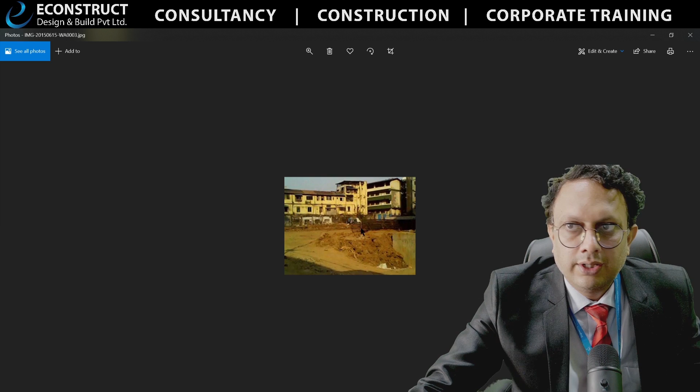This is the first photograph. The excavation is not started. These are the neighboring buildings. There are 3 basements, so you can see that if you want to construct 3 basements, you need to see how the neighboring buildings need to be protected. You have to protect the neighboring buildings for sure.

Let's go to the next one. In this slide you can see the excavation, and this particular portion is known as the waterproofing. If you remember, during the last session I told you that you require certain waterproofing - membrane waterproofing, or some people use tar material. There are varied options, but you require the waterproofing so that till the time the raft gets constructed, or if water starts coming, you will have the reinforcement laying here with certain spacing.

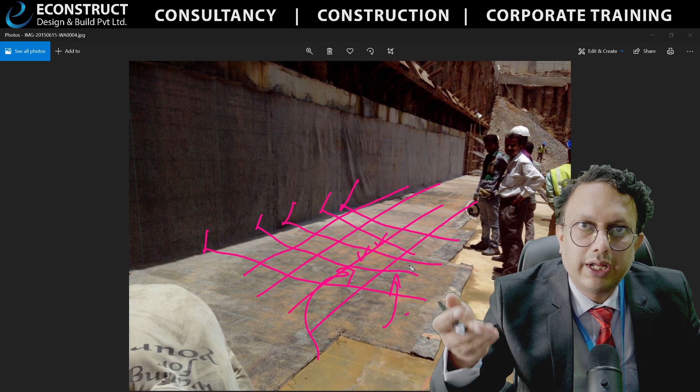So if there is water here, the rusting will start. Is it a temporary phenomenon? No, it may not be temporary. Later on also this waterproofing helps to give a layer against water getting directly connected to the raft surface. So this is the waterproofing area that you require. Later I'll show you certain drawings also, so you will understand how you should be dealing with this on site as a project manager or civil engineer.

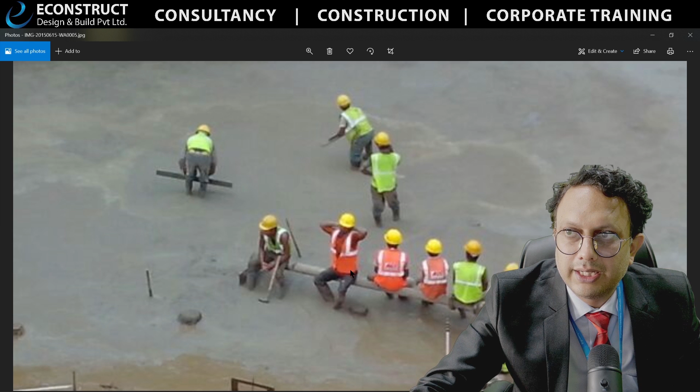Now the next one is the PCC. You can see people doing the PCC here. What all things do you require? First of all, there are shoes that have to be used by the laborers, plus on the hands you require hand gloves. You require the helmet, because if anything falls, like a stone, the person should not get hurt. So all these things are extremely important.

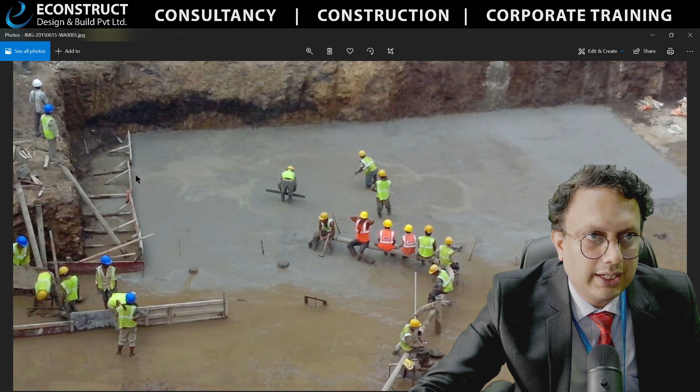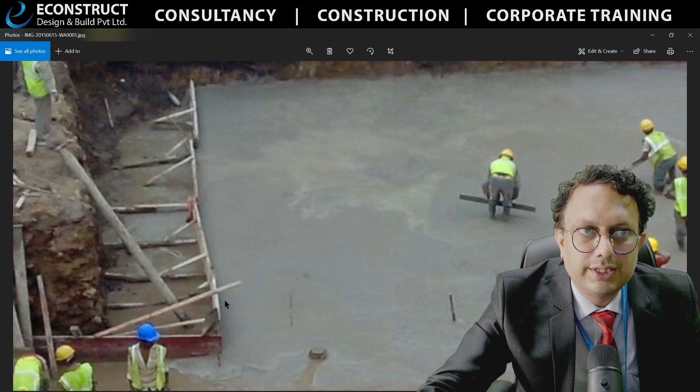If you look at this portion, what is this? This is basically given because the PCC or the raft is only up to this place, so you need not go for PCC at this level. That's the reason this form work has been given.

You can see generally excavation and PCC, and this is Mumbai, so if there is rain, a huge amount of problem comes up. Generally for any major excavation activity, particularly in Mumbai or Chennai, the developers and builders start working at very high speed so that later on there should not be any problem.

Now this PCC has been done, but you can also see that over here the retaining wall is constructed. You can see that the construction of the retaining wall is over to a certain extent. All right, let's go to the next one.

Now this guy is doing something. What is it doing, and what is this? I would like to show you that this is the shoring pile. This is a retaining wall.

Now, the retaining wall has been constructed or cast in different phases. You can see this is one phase of construction - let's say this is the first phase, this is the second phase of casting, the third phase, and the fourth phase of casting. There are certain markups of the levels - these markups are the levels. This is how you will try to monitor certain things.

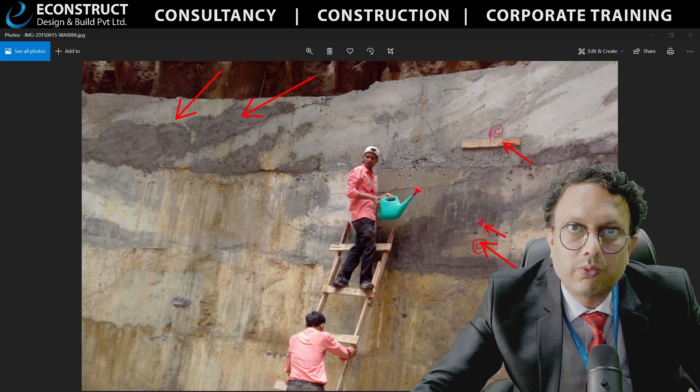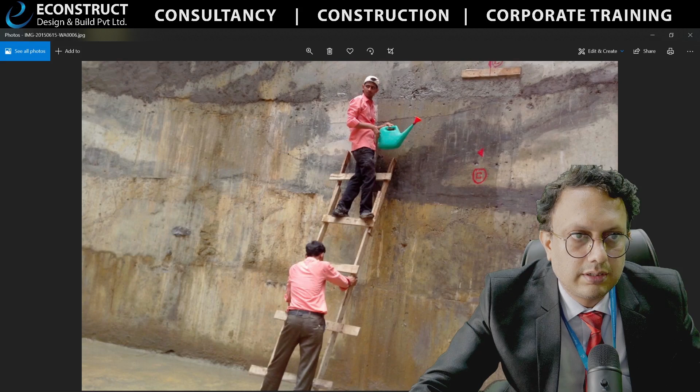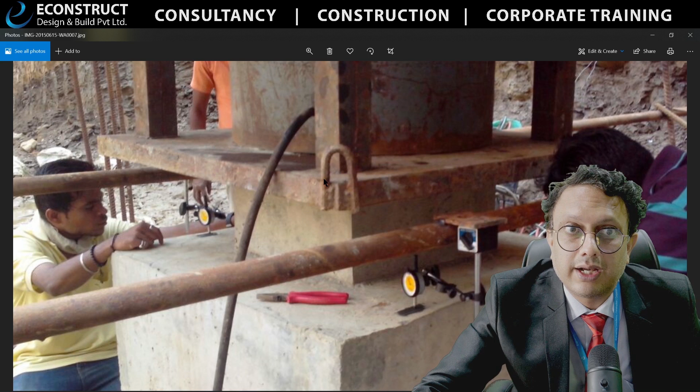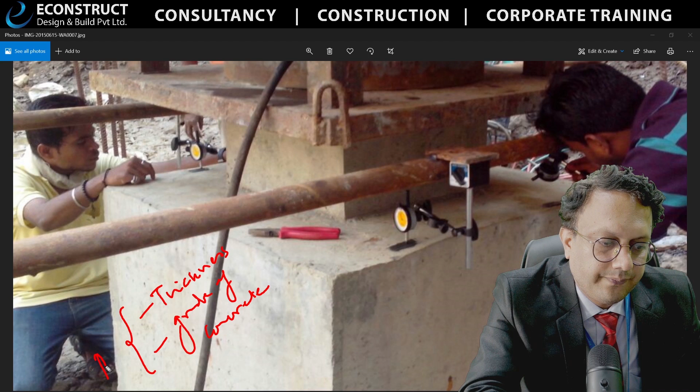Right, now let's go to the next one. Okay, now what is this? This is the foundation load testing. If you remember, yesterday I also showed you this for India Tower. Somebody will say, sir, that is India Tower, a 130 story building, this is just a 55 story building, less than half of that. So there also you can see the foundation is constructed. It's not the real foundation of the building, it's a dummy foundation, but the grade of concrete, thickness, grade of concrete, everything has to be the same as the raft. Why? Because it has to be simulated with that.

So let's say, for example, you might have seen that to test if rice is cooked properly in your kitchen, after some time you take a sample piece of it. That is actually a sampling method. Similarly here also, you have to make sure that you are checking the same piece of the raft, and that's how the same thing has been done.

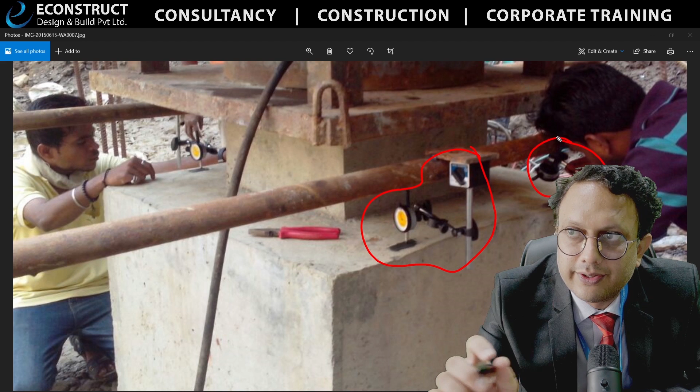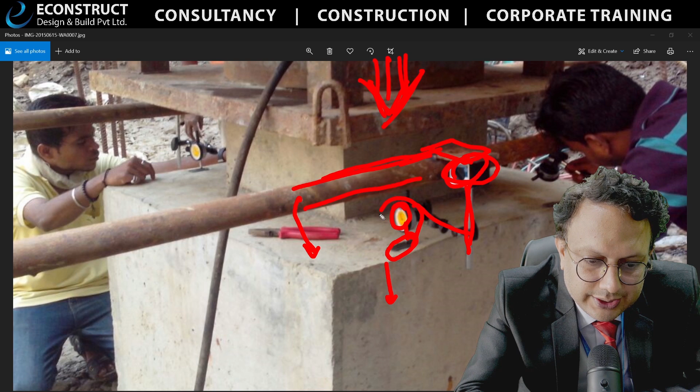Now some of you might be wondering what the hell this is and what this guy is doing here. So I would like to show you that this is the rod which is not connected to this raft or the piece of foundation. So what's happening? This one is actually anchored here, and there is instrumentation here, a calibration here for this. So whenever you put a heavy load on this, some kind of settlement will occur. It will be reported and calibrated here, because this is in reference to what exactly is happening, and this is in reference to the foundation. I hope you are getting what I am saying.

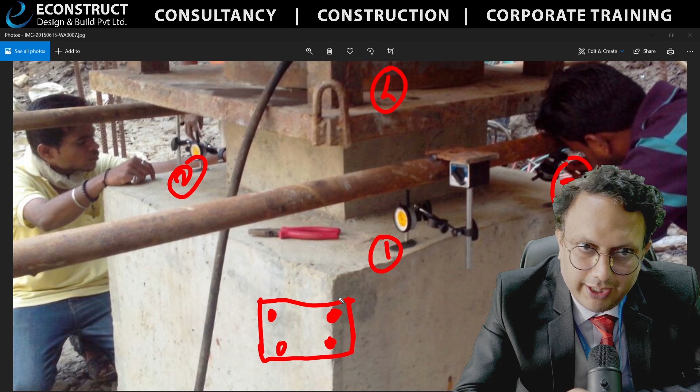Okay, so is this only at one end? No. Generally this is done at 4 areas - 1, 2, 3, and the backside, the 4 areas. So if you have a plan, this is the foundation, at the 4 corners we will be doing this, and there is an average, mean average, all these things would be recorded. Understood? So this is the foundation testing machine.

It's not a plate load test. Generally in a plate load test, the plate will be hardly... you can go through certain YouTube videos or photographs of how SPT testing is done on site. So this is not that, this is the foundation load testing machine or procedure. This is a little costly because you need to first construct this, call these people, give the pneumatic arrangement, there is instrumentation involved, there are people involved. So this is a bit more costly than the SPT, but the calibration or results you get are far more advanced here.

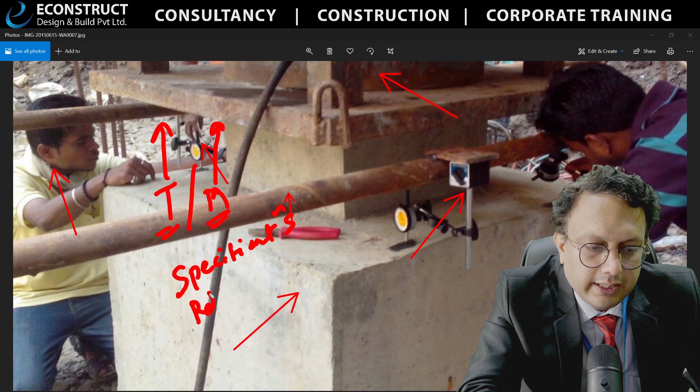This will take a little more time also. So if you're considering the time and the cost, in both cases the time and money will be higher, but the accuracy when it comes to specifications, reliability and accuracy - all these things will be more with this kind of test. That's why people generally prefer something like this for high-rise buildings. So this is the foundation testing load. You can see the pneumatic load - somebody will say, sir, how do you give that much load? You don't need to construct the entire 50 or 55 story building to implant the load on this.

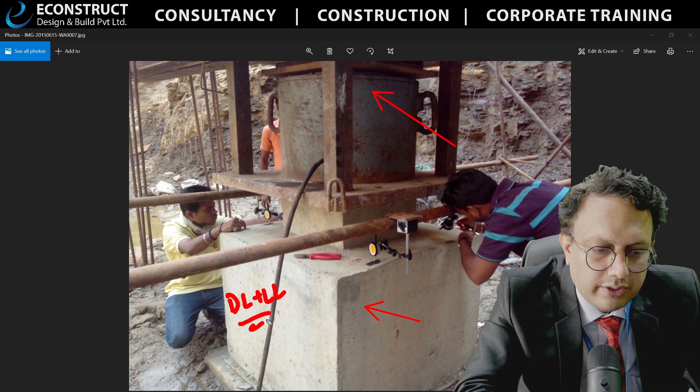The entire 55-story building is not resting on this, correct? This is just one column. So what you will do is take the maximum dead load and live load. You need to ask, what is the dead load plus live load in kilonewtons? What is the maximum value of this?

That value you need to implant here. So whenever you are getting the foundation data or foundation drawing, you should ask them to give these figures so that you can apply the same amount of load and thickness of the raft you are considering, and with the instrumentation your exercise will be more genuine.

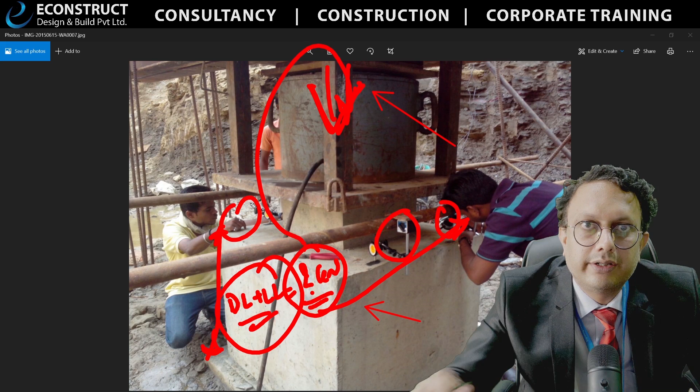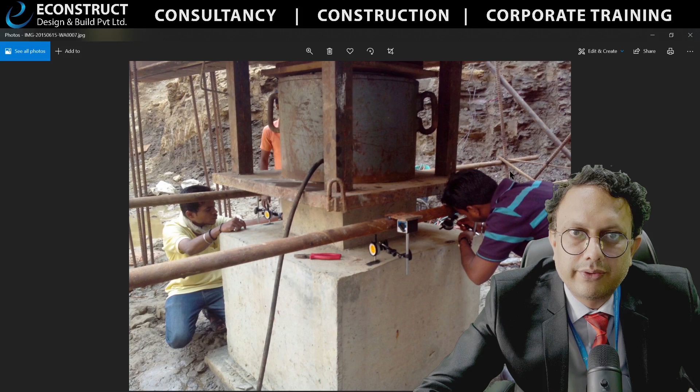During college days, we were working only with the plate load test and SPT values. That is okay for a G plus covered 2-3 story building or maybe 4-5 story building, not for such kind of buildings.

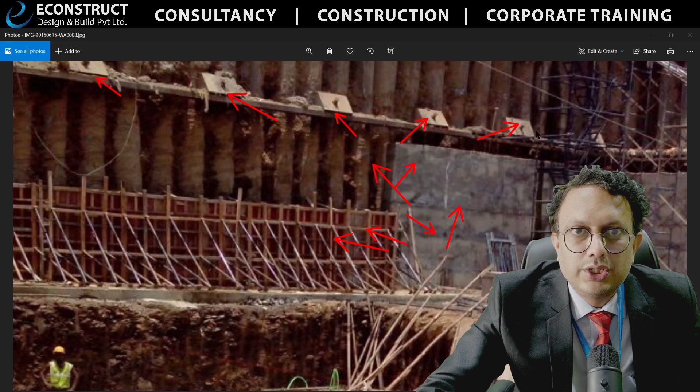How to remove it? It's just like a screwdriver, something like that, you just need to remove this. The tractor's backside wheel is quite big. How to remove that? There are nut bolts, you just need to unbolt certain things, and because there is a huge amount of pressure, you need to do it mechanically, you cannot do it with hand. So when to remove this is also important.

Now let me tell you a few things so you can understand. This is not the starting position, correct? If you go up it is quite high, the height is quite big, and it goes down also. So a tremendous amount of pressure is there on these piles to come out, to come inside like this.

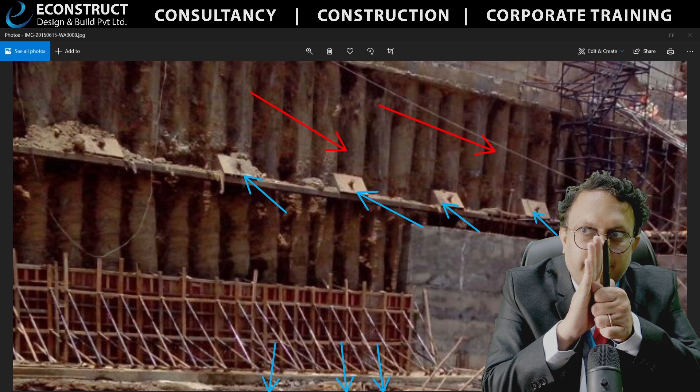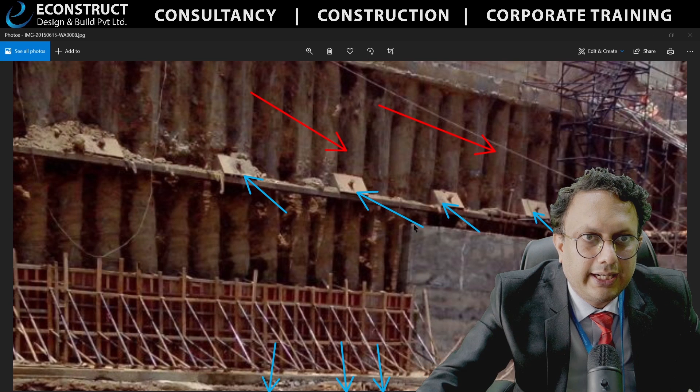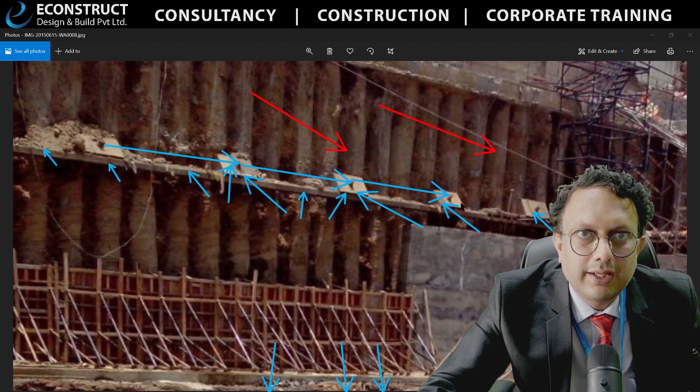To stop that activity, you have given back support through this, and there is an anchor also down that helps. It's something like you have a pile here, and there is tremendous pressure from this side, but from the other side you give nails like this, these are the nails. This is connected with the beam here, and at certain intervals, from here to here is one spacing, from here to here another spacing, from here to here another spacing. So equal spacing is given.

Somebody was asking what is the spacing between the two? You can see there is no spacing, once this is cast, immediately the next one is getting cast, we will not leave any space in between. Obviously you have to have some space, otherwise you cannot construct this. So space is created, generated, not allocated.

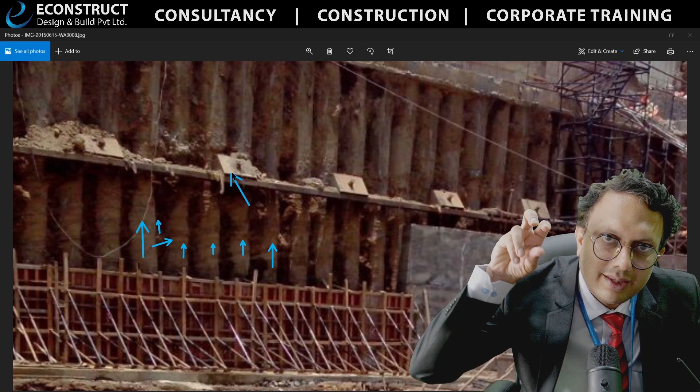So whenever the space is there, where you see the space, you will implant this at a certain distance. This is how the deep excavations are carried out. And this is the shuttering work, and this is the construction. Now when to remove this? Because this has to be removed since it is there in the neighboring building.

Understood? So when to remove? Once this construction is getting here, actually, that time you are going to remove it. Why? Because this particular retaining structure will give the support to these piles.

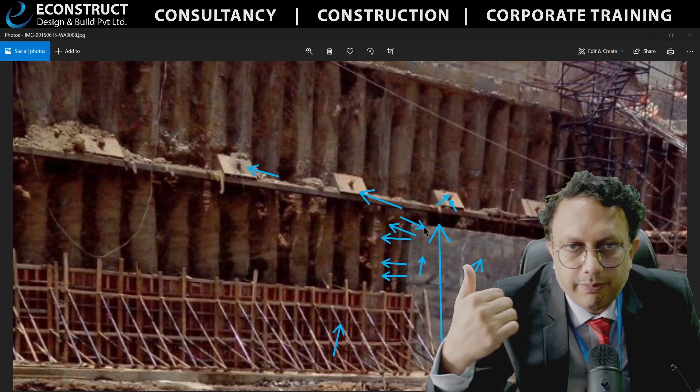Do you agree? It will stop the movement of the piles coming to your plot boundary. So this is how certain assumptions, techniques, and instrumentation has been carried out with safety and accuracy. On the top you can see that there is a pile beam also, so that all the piles are in one line.

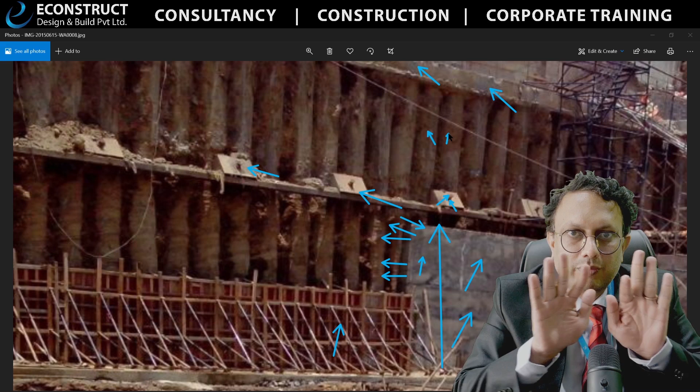Otherwise, as I told you yesterday, suppose these fingers are the piles, one pile will be like this, one pile will be like this, so you cannot work with this. So all the piles should be in one line so that you will have a proper surface. This is the proper surface, and then you can do the construction work over here and start the building construction. So that's how it is.

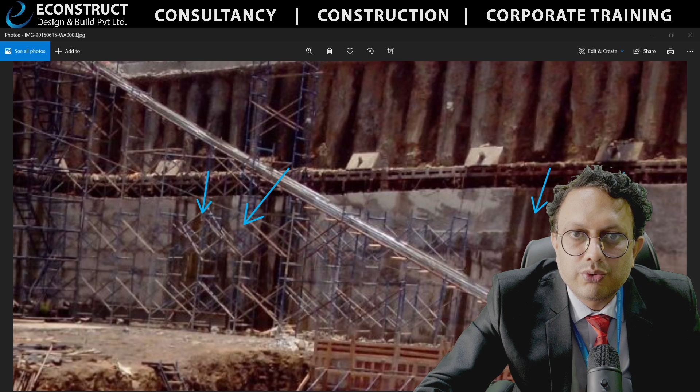You cannot stop this water. Many times you cannot stop it. This is the natural stream of water. Sometimes you hear also, the water is coming, water is coming. You cannot stop this. So what to do? You have to lay a passage in between so that there will be a drainage system over here.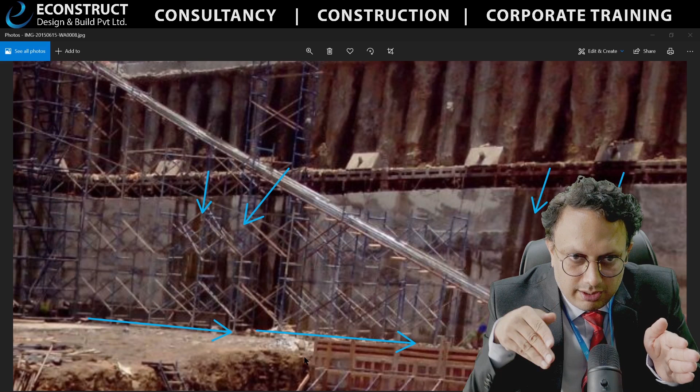It's like what you might have seen in agricultural areas. They will create a small passage, a small canal, from which the water is going, and somewhere they will dig a little bit bigger. Actually, it is a well. Well means the water is stored there, and from that storage the water will be pumped outside.

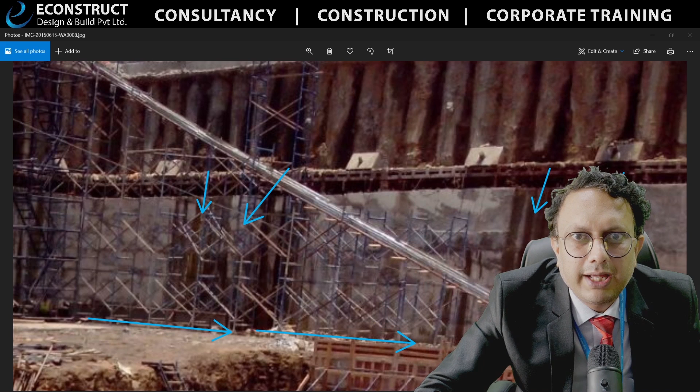Understood? Sometimes if the water is less, it will be utilized for curing purpose. If the quantity is quite big, it will be pumped outside. For curing purpose and other purposes, you have to see the quality of the water.

Do you know, I think in the first year engineering you were having the subject called water. So what is the pH level, the contents in the water, sulfate content - how much, this content - how much. So if you are using the water for construction, whether it is for concreting or for curing, it is better to get it tested. It will take hardly less than a couple of thousand rupees for testing, but you have to see that.

Alright, so this is how this particular photograph will give you the information. Let's go to the next one.

Now here you can see that the people have started working with the second stage of the concreting. So here are certain phases: this is the retaining structure, the first phase of the retaining structure, this is the second phase of the retaining structure. This is the raft at the upper level, this is the raft at the lower level.

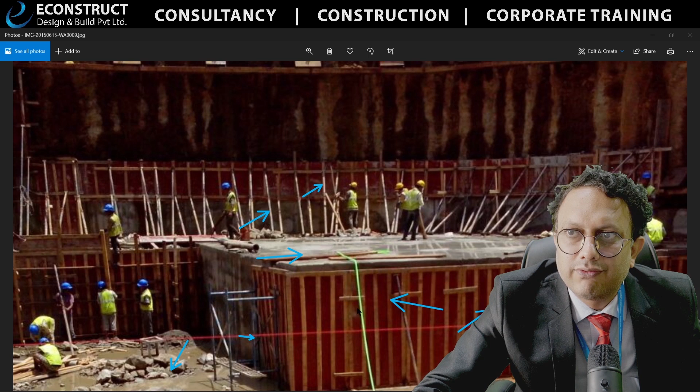This is basically the form work. This is the form work. Understood? Here you can see the engineers, the project managers and others giving certain suggestions. Here you can see that the laborers are working.

Understood? Here there is a first level of the PT strand. Can you see that? So why this cannot be constructed, why it is stopping only at this particular point? It is because this PT strand has not been removed.

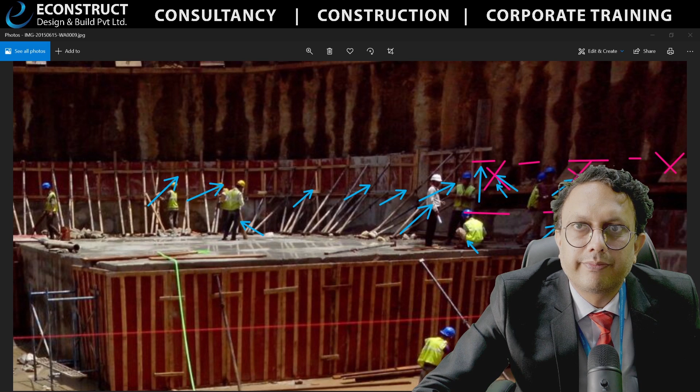Understood? So the moment you have constructed, then you need to start removing this. You remove this, then you remove this, then again you remove this. Once this is done, then you can continue this operation on this side, also this operation on this side. Got it? Now once, for example, this second phase is over, this also has got removed, then you construct, then on the top also there is a second phase.

Here also you can see this is the second phase of the PT strand, that also needs to be removed. Understood? That is a temporary structure that has to be removed. Alright, so I hope you are getting this.

Now the next slide, this particular photograph is basically for the retaining wall and the retaining wall foundation structure. What does that mean? You can see there is a bottom reinforcement of the raft which is getting laid over here. Now this is basically the tower building raft. This is basically the retaining wall foundation or retaining wall beam raft. So structurally this is the strip footing.

Strip footing means it is like linear fashion footing. And this is like isolated footing. This is also isolated footing, which is combined inside the raft. This is the retaining wall reinforcement. Generally it is in two layers. Currently only a single layer is going on.

Similarly we will have the second layer. So that's what people are working on over here. Now why are we constructing this? Why are we not constructing at this place? Because initially you will construct the retaining wall first. This is the retaining wall that has to go, then this construction of other areas has to go.

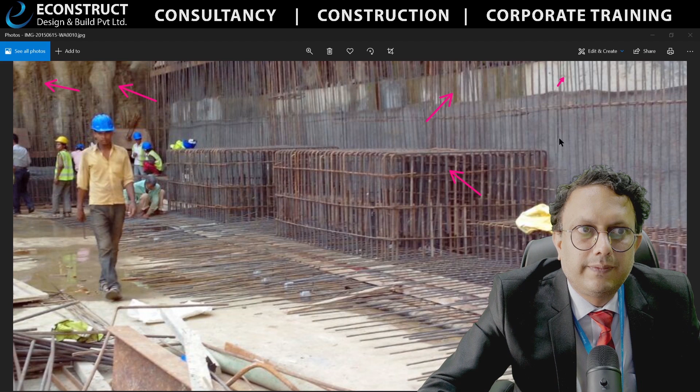Sometimes you require some shotcreting material also here. So this can be the shotcreting. Shotcreting means what? They will create the passage which is little plain. It is like if you go to any salon and want to do shaving, he will spray some water on your face. So that kind of shotcreting means it is the spray of not water, but the spray of concrete done on the surface, just to make the surface plain, and then the reinforcement would be carried out, and then the retaining wall construction would be carried out. So that is basically the sequence.

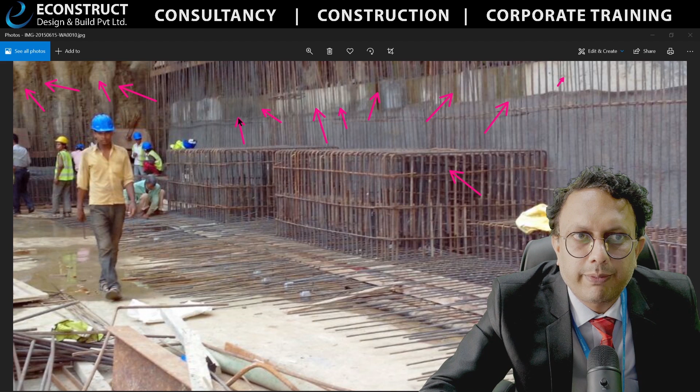On this, directly the retaining wall construction cannot be done, because on the other side of the retaining wall, it is very muddy land. It is not a proper surface actually. In order to create the proper surface, this sort of shotcreting can be done.

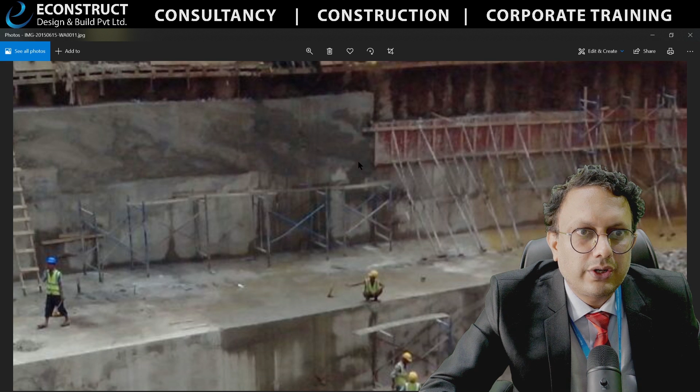All these photographs are of this same building, so don't get confused. Now here, this is phase wise. So here you can see that the second phase of the PT strands has not been removed. Also you can see that there is no retaining wall structure finished yet. But here you can see that the shotcreting as well as the retaining structure has already finished, right? And now people are working with something else now.

These are the supports that need to be given so that these things don't come out. That's why the supports are given.

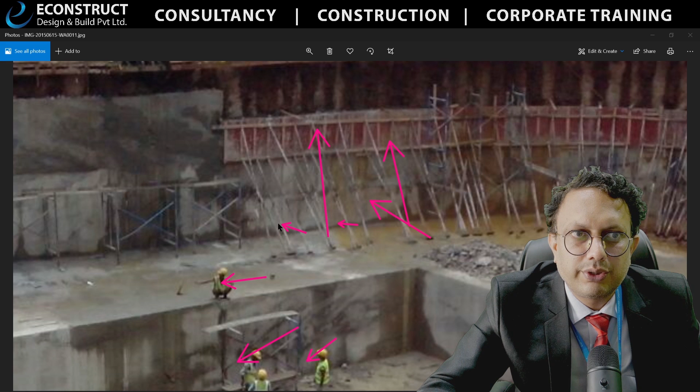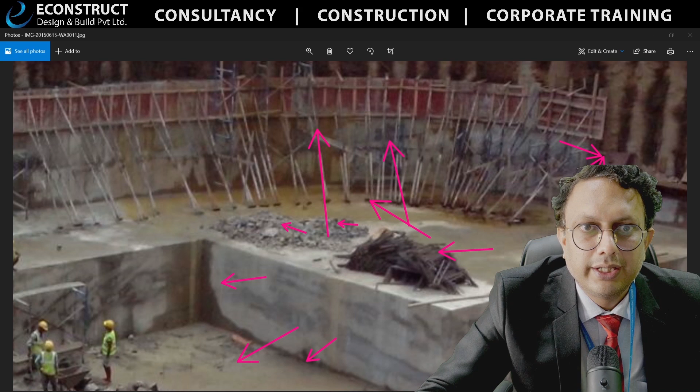So this is quite heavy work actually. You have to plan it out properly: how many laborers you require, how much material you require, how many pipes or steel, the formwork systems that you require, the reinforcement, how you are going to keep the reinforcement and all, how many rebars. See here, the rebars are given over here. The PT strands also, this is the PT strands. So there would be different vendors for different trades. So vendor management, it's a hardcore construction management.

Okay, so there are dependencies, activities are there actually. And in many places I have seen that people want to work as a planning engineer, so many people see that. I'll just show you, I'll just take this as an example. Let's say this is one line, this is another line, this is third line, this is the fourth line and all. And later on you will see that there are certain dependencies.

This is like this. Okay, so you will see that not like this, it will be something like this. A stylish arrow will be given. So these are bar charts, Gantt charts and all. So everything, this has to be there in your head.

Understood? So what next? What next? Then what next? So other people are working on the bar chart now, which is a little bit micro level analysis, but macro level is already there inside.

Many times, you are the director of the movie which is going on, actually the project on the site. The movie is just a film. There is no reality. Once it is shot, the matter is over. Here it is not like that. It is the concrete reality.

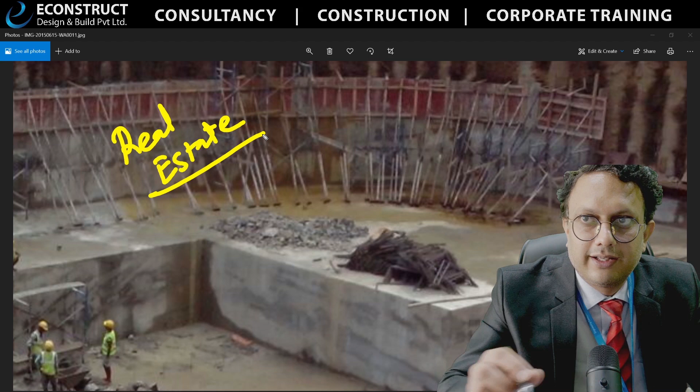That's why this is known as, I'll just write down here, am I right, what is it known as? Real estate. Other places it's not real, they don't call it real estate. This is the only place everybody calls real estate. Others are like balloons: today they are there, tomorrow the IT, something, server gone, this gone, program got crashed. All these things will be happening. But this is the real estate. That's why this is having incredible value.

If you see any country, how many buildings are there, how many monuments are there, how much amount of infrastructure is there, that will create the real value of the GDP, and many other things are dependent on that. So this is the real estate, right?

So more and more you start believing in this kind of things, more and more you will see it. I got 5 flats, I got this much land, that's the real estate. I got this software, but today it is there, tomorrow I don't know. It might be crashed, some better software will come, upgradation you require, ifs and buts are there.

Okay, imagine that I created one software. We are also developing the EPMC software, you know that actually. Tomorrow a better software will come, another better software. That's not the real estate. This construction, this is the real estate.

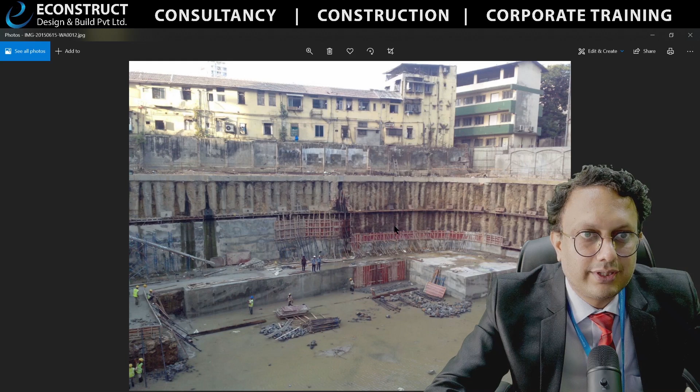Okay, so let's go to the next. Why actually we are doing this and what are the different phases?

So here you can see this is the neighboring building. If you start digging, the soil will start coming down from here to here. Along with that, the building also will come down. Of course, you don't want that. So that's the reason we are giving this kind of protection systems, 2-3 layers.

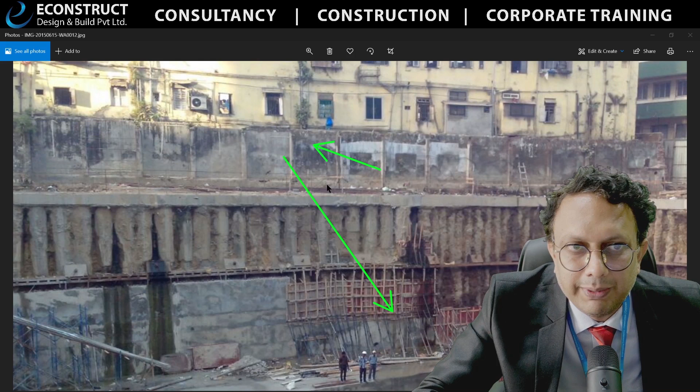So the first protection layer is this one. What is this? So that any passerby doesn't come and fall down, any dogs, cats, or some persons, or maybe small kids, what happens is they will just peep inside and they might fall down. That should not happen. So this is the first preliminary level of protection. This is also important, and later on it can be used as a compound wall if you want. But generally it is given as temporary, unless you are very sure it can be used as a compound wall later, then you can construct it as an RCC wall.

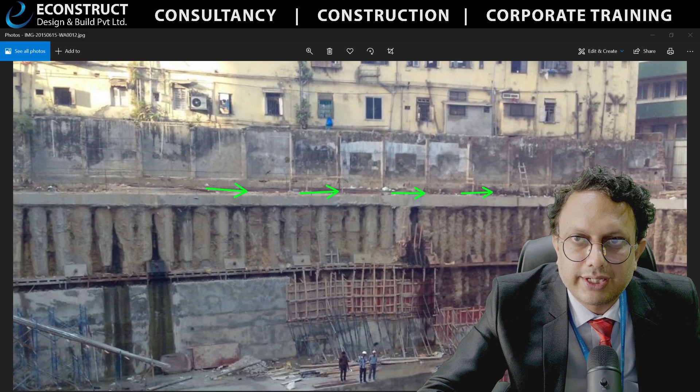Now the second layer, here you can see there is a small passage because every plot will have a setback distance to a certain extent. So there is a small passage, and then you will see there are the shoring piles, there is a shoring beam, which is the pile beam here, and then this is the entire beam, this is the place where you will have the PT strands. From here you can see that water is coming out.

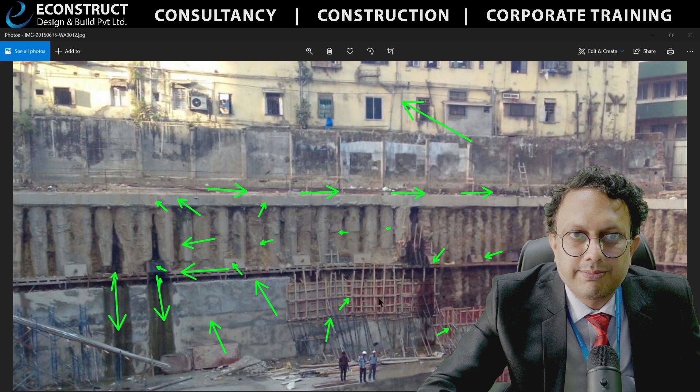Okay, so this is a little wider view, so I'm just repeating this. This is the retaining wall structure which is going through different phases. This slide is going to help you understand all this money we are putting is only to protect the neighboring plot. Imagine there is no neighboring plot. We would have taken some 45-degree slope and the matter is over. You don't need to go for this kind of shoring structure at all.

Got it? So early stage construction also has certain advantages. Please understand, suppose a plot is there and nobody else, the neighboring people, have constructed yet. So it's good, you can start immediately. If the neighboring people have bought the land and want to construct, you can talk to them and have some 45 degrees. So you can save a lot of money, not 1 or 2 lakhs, you can save crores of rupees. Understood? It's a very big money, also the time.

So there are early construction advantages also there. You will get a little less price, but at least the foundation, the basements and all, you should finish as early as possible. Alright, so this is what you have studied from here.

Yeah, so this is really early stage, before doing the PCC. You can see the height of the person, and you can see how big it would be. So this is how it is. You can see the piles are going below. This is the first layer, this is the second layer. So the things are getting worked out. This is all the PCC.

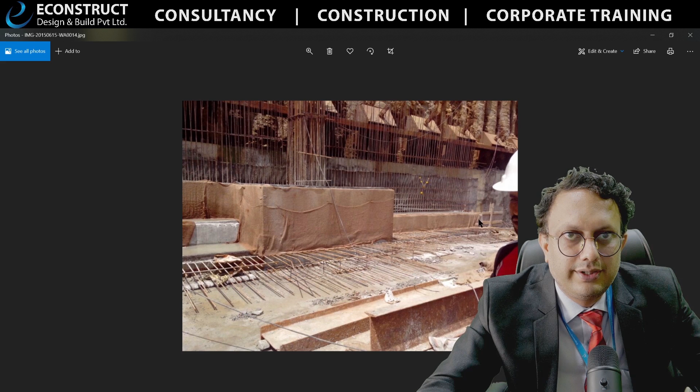Okay, so this is going actually the same, it's a similar slide. Alright, so these are certain photographs which I wanted to show you. A few more are there.

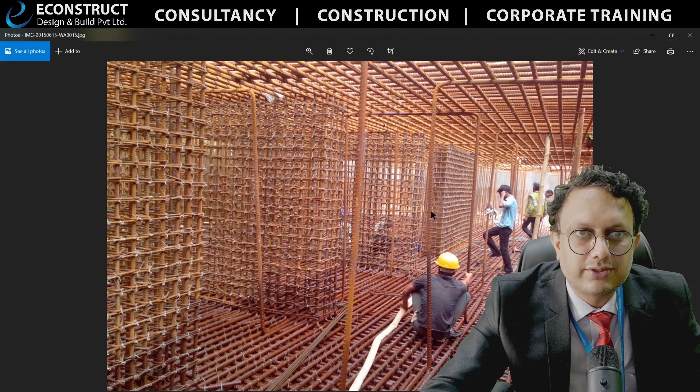Now what is this? This is the real work. This is the raft. This is the top reinforcement and this is the bottom reinforcement. These are the shear walls. These are the people who are working inside the raft. The raft thickness is 3 meters. The height...

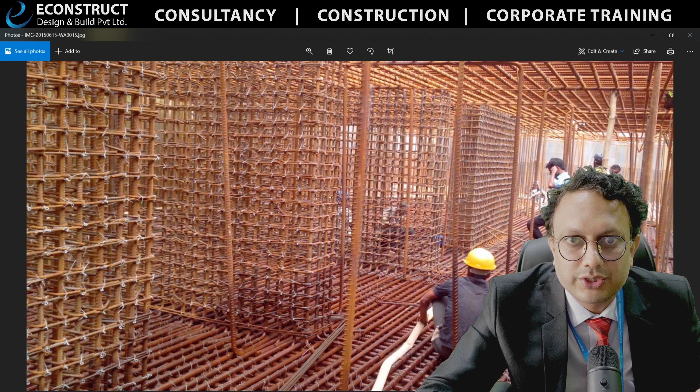Actually, you can just look at the building where you are living now currently. Look at the ceiling, that is the depth of the foundation we are dealing with. This is what actually, and you have to go inside to lay the reinforcement. There are many varieties, many multiple layers of reinforcement. What is the diameter of the rebar? It is 32mm.

Understood? What is this which is going straight? This one, this one, this one, this one, this one - we call it the chair rebars. The function of this rebar is to maintain the distance between this and this. It will maintain the particular height between the top jolly and the bottom jolly, or the top mesh reinforcement and the bottom mesh reinforcement.

Design of this is also very important. You cannot give a 12mm bar, otherwise the bar will start buckling. Sometimes you require an I-section also to be given here. It is a bit more costly but more reliable.

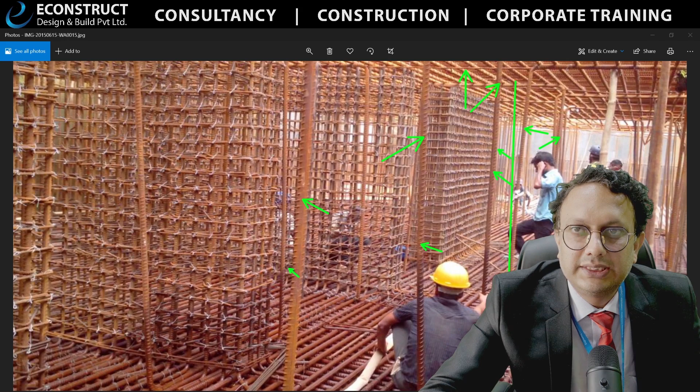So these kind of systems are being used.

Now what is this picture? This photograph is basically the bottom reinforcement. People are putting the rebars of the bottom reinforcement. This is the top rebar, and you can see how people are working on it.

Here you can see that certain works are going on related to the shoring system as well as the retaining wall. So activities are simultaneously going on - this activity is also going on, this activity is also going on.

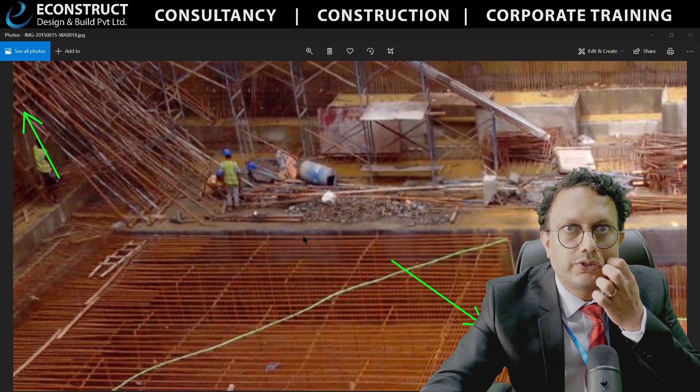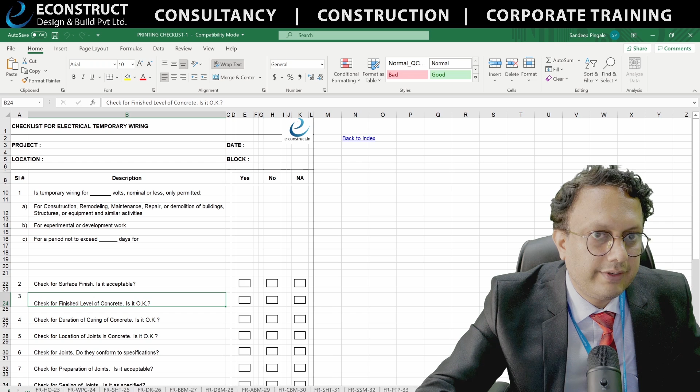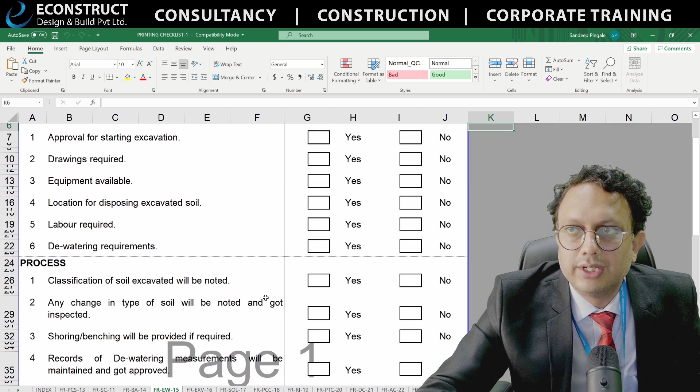So this is how actually the deep foundations or such kind of things, excavation, everything has begun with. Now there is a different excavation checklist. We were there in surveying, authorization, earthworks, so we were there in the checklist. I'll show you, I have given the entire picture actually.

Now coming to the documentation. So approval for starting excavation, yes or no. Then you will have the drawings required - do you have the drawings, yes or no? Equipment available - do you have all the equipment available? Location for disposing the excavated soil, where you can dump the soil. You cannot dump it on the road, otherwise there would be different problems.

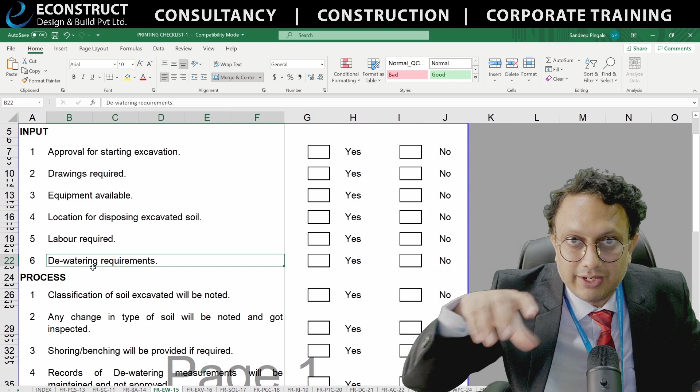Labors required - do you have sufficient labor? Dewatering requirement - that's the welling and taking a small canal, and wells and a pump over there. Okay, so this is the input check.

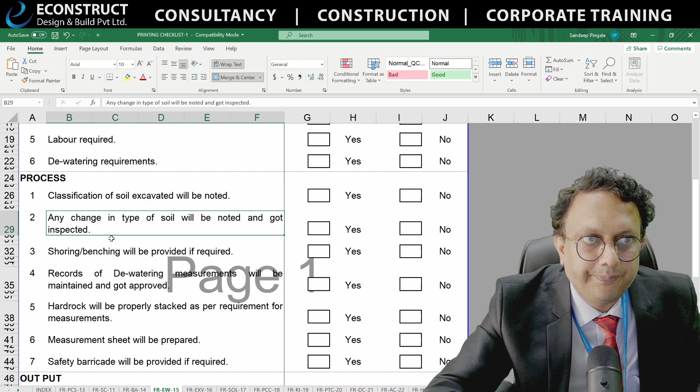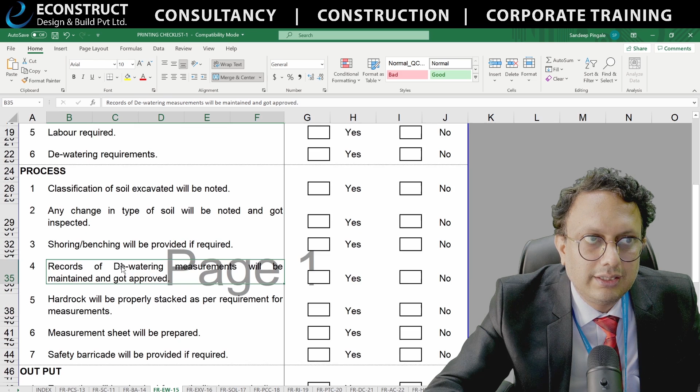Now the next one is process. In the process you will see that classification of the excavated soil will be noted. Then any change in type of soil will be noted and inspected. Shoring or benching should be provided if required. Okay, so this is the process.

As a civil engineer, as a project manager, you should be a little bit of a process person. You do the work, but are you going in a proper channel, proper process? So records of dewatering measurements, then hard rock will be properly stacked as per the requirement of the measurements. Then a measurement sheet will be prepared, and safety barricades will be provided if required.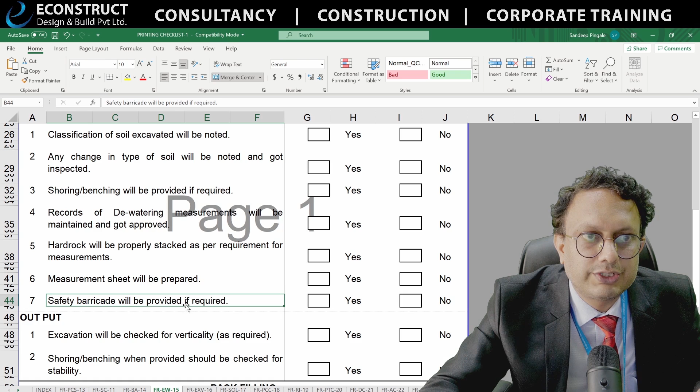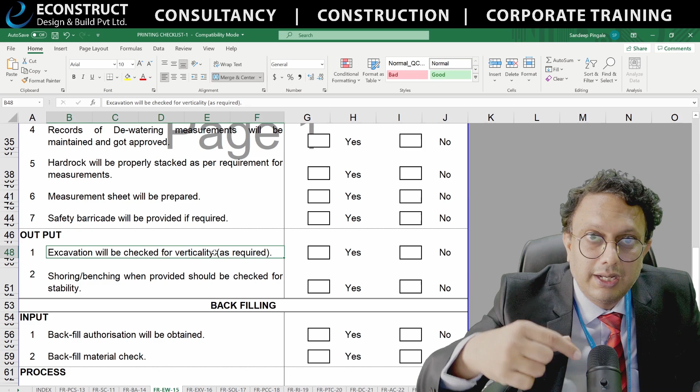Output - what is output? This is basically, excavation will be checked for verticality. Verticality means excavation has to be checked like this - if it is sloped like this, then it is a problem later on. So this is verticality, so the plumb and gravity, that way it will be checked. The next one is shoring, benching, when it is required to be checked.

Backfilling - this is basically the backfilling. Backfilling authorization shall be obtained. So once everything is over, shall we start the backfilling? In this case, there is a basement, so there is no backfilling required. At some places it might be required also, so we need to check that as well.

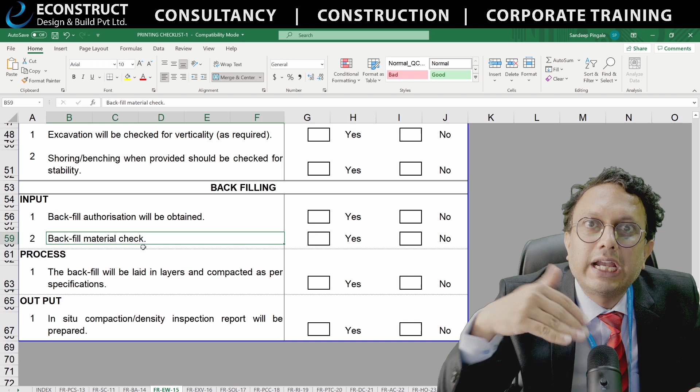So backfill check, material check - which particular material are you dumping, the rotten garbage material? No, you have to use the proper material so that it doesn't get decomposed, otherwise later on it will create a lot of problems. So proper backfilling material also needs to be ensured.

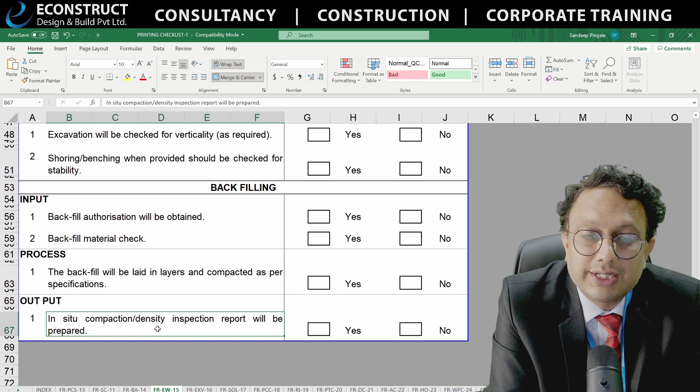Another thing is the backfill should be laid in layers and compaction is required - yes or no. Output: in-situ compaction density inspection report would be prepared. So compaction layer for the backfilling material also you require sometimes - is it yes or no. So this is what the checklist looks like.

Now some of you were wondering, sir, can you give me this spreadsheet or something like that? In the EPMC we already have this particular spreadsheet incorporated. Please go through that - Excavation number 15 is this particular sheet.

Alright, so I hope you have understood certain things about the starting work of excavations. I would like to request you to go through the deep foundations, there are certain other videos also there - just watch through YouTube or other areas. I would like to tell you that the diaphragm wall is something we are going to discuss in the upcoming sessions, maybe on Monday we will start working on another phase of deep foundations, because these 2-3 things are extremely important.

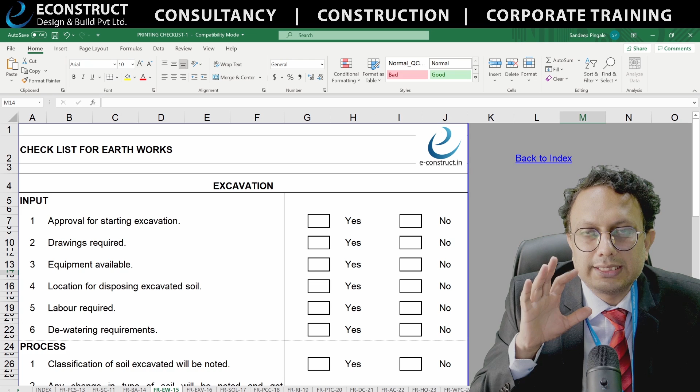Once the deep excavation, foundation, raft, or maybe piles and all, once it is done, the upper level—first floor, second floor—this is more repetitive work. There is no big fancy works required, but certain checks are definitely required. As a civil engineer, as a project manager, what are the checks required for the deep excavation and all? We'll look into it in the upcoming sessions.

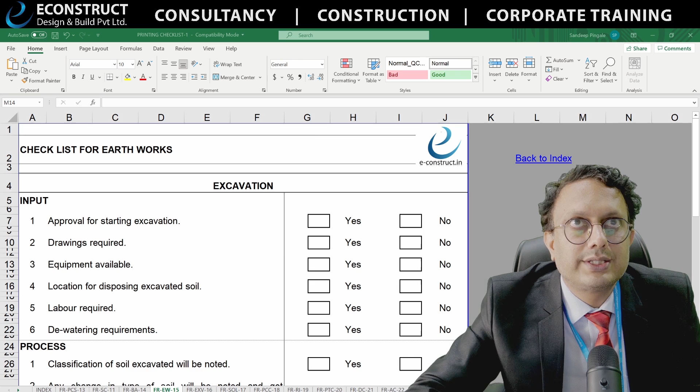Sir, these types of constructions, are they using mat and raft foundation or pile foundation? Yeah, see, currently in this particular project which I have shown you, we have constructed a raft foundation at the base, but to go that many deep down, we have to have the shoring piles. Shoring piles also are required to make sure that the neighboring buildings—I have shown you the photograph before construction gets started—are protected.

Neighboring buildings are there, and the shape of the neighboring buildings is such that any time that building will come down. That is so old actually, but still because of this excavation, if the building comes down, there will be a legal case. Do you agree? Imagine that's your house and somebody else is demolishing your house. Even if you are not staying there, it will be a very big case. You will make sure that the neighboring building will not be affected. Why? Because there are certain emotional values, sentimental values, and many other things involved. So you need to protect it. That's your legal and professional duty basically.

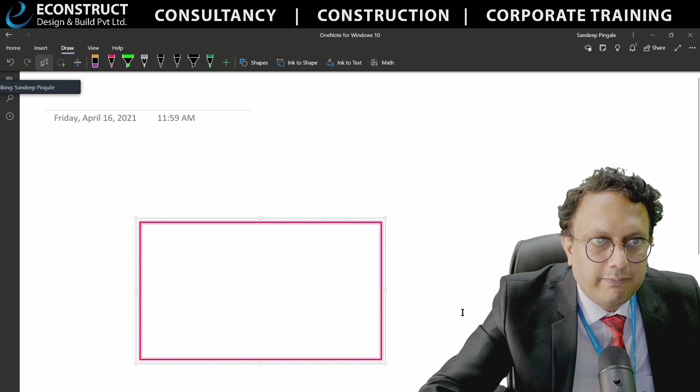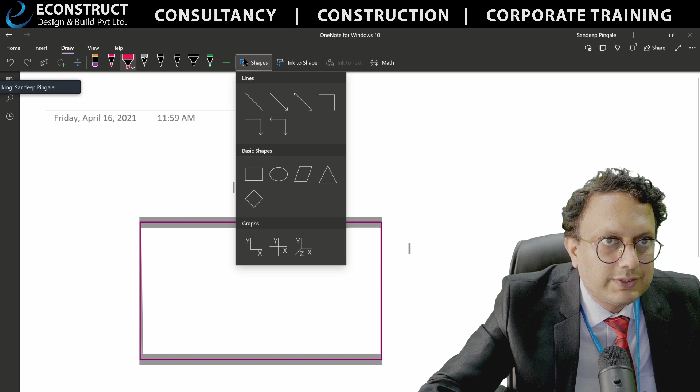Let us say this is the plot boundary, and within the plot boundary you have the retaining structure constructed at two sides—one here, one here. I'll put the gray color here; this is basically the retaining structure at one side, and at this place also it will be something like this. But at one side, let's say, I will be giving some kind of space—this is a slope.

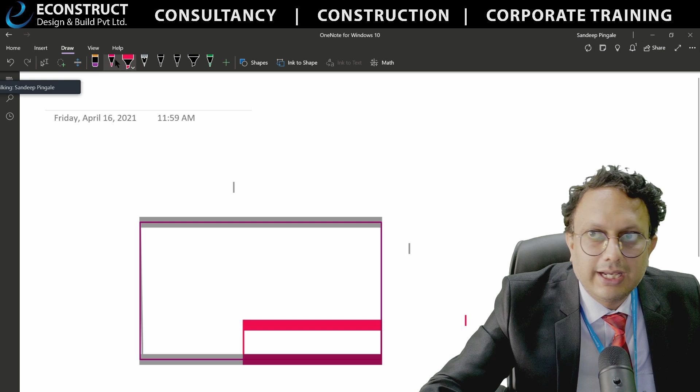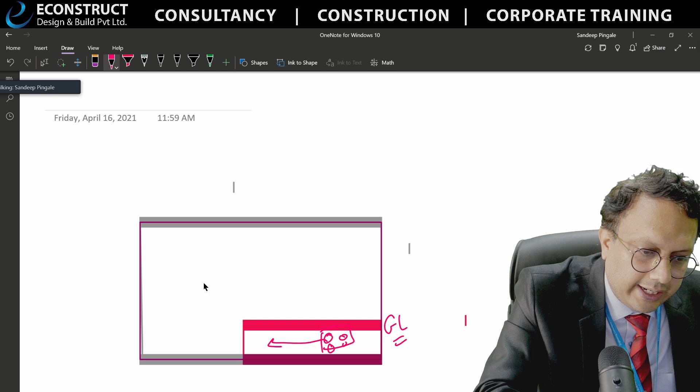So that any vehicle will pass onto this. For example, if there is a vehicle passing from here, this is basically the slope. This is the GL, the ground level, and this is the bottom level. So there is a slope here. What they will do is complete here, complete here, complete here, complete here, and then these things will come out, and this portion will be constructed a little later on. Got it? This slope also sometimes will be done exactly at the edge, or sometimes at this point, so that this portion also will be finished.